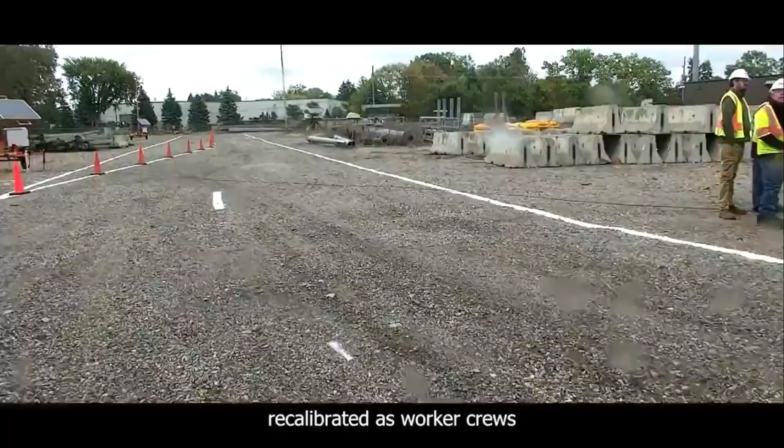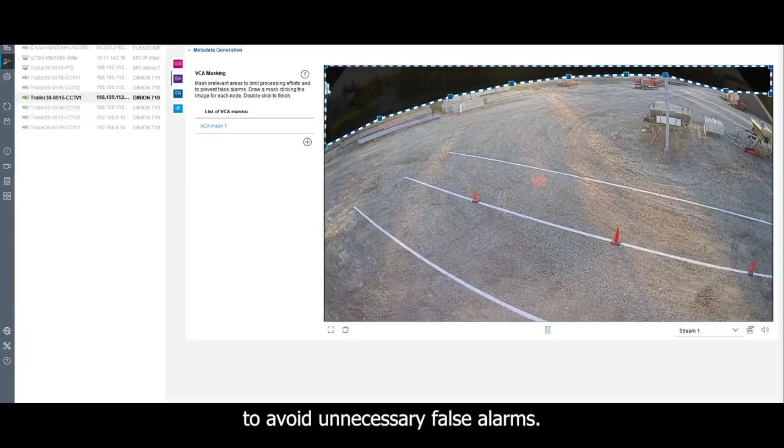Calibrating the system is as easy as drawing shapes on paper, with notifications activating based on object motion or presence in defined alert zones. Conflicting objects or areas that should not trigger alerts can also be easily masked out to avoid unnecessary false alarms. Having multiple cameras on each trailer means multiple viewpoints are possible, maximizing coverage.

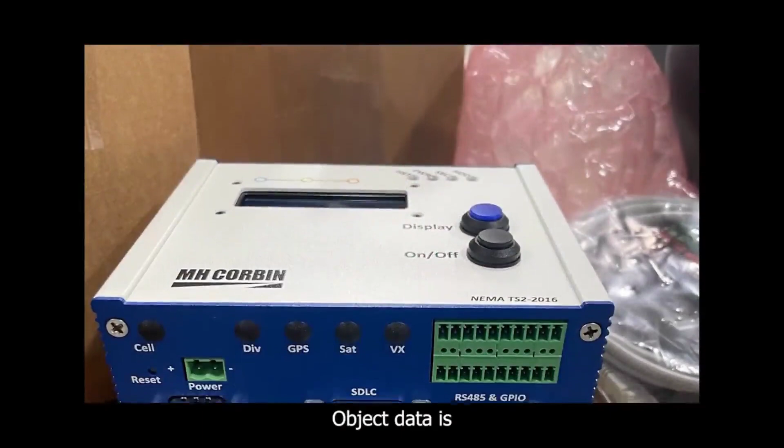Once the cameras are calibrated, they detect and track the movement of objects, including distinguishing personnel from vehicles. Each detected object has GPS, speed, and heading information calculated by the camera based on its position and movement relative to the camera. Object data is then fed to a small computer in the trailer's cabinet enclosure, which processes the detected object information and generates connected vehicle messages.

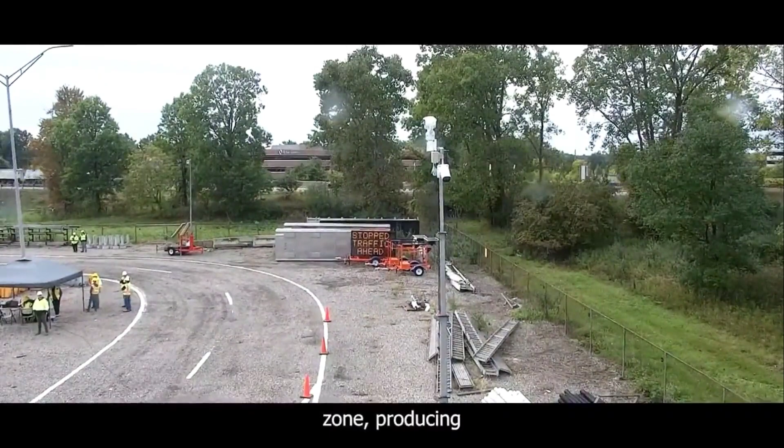These messages get broadcast by a roadside unit radio installed on the trailer mast. They can be received by devices called onboard units installed in participating fleet and freight partner vehicles, or any other equipped vehicles traversing the work zone, producing in-cab alerts and notifications about work zone conditions and objects. Personal safety messages are produced for all detected personnel, and basic safety messages are produced for all detected vehicles.

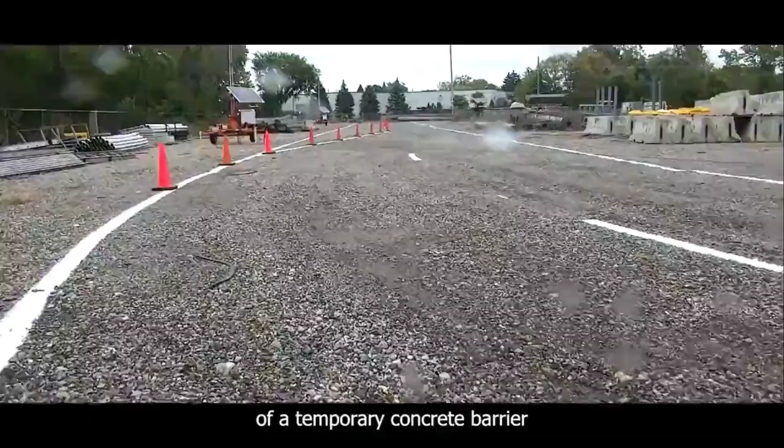Personnel that leave a protected area, such as by walking outside a temporary concrete barrier or operating in a lane closure only protected by barrels, will trigger special traveler information messages that warn operators of unprotected workers—look out for workers. These messages enable equipped commercial motor vehicles to see and display the presence of those objects, greatly increasing operator awareness of their surroundings.

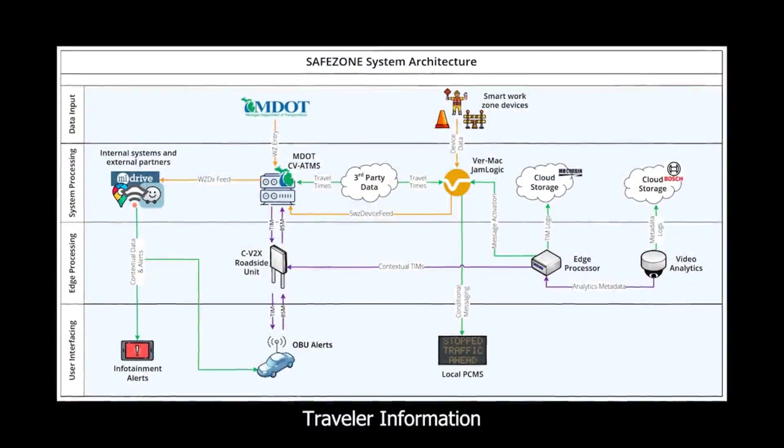Other components of the system produce messages as well. Smart work zone devices integrated with cloud software will detect the formation of queues and the activation of lane closure arrow boards. This information generates traveler information messages produced by MDOT's back-office connected vehicle ATMS and broadcast through the trailer radios, warning operators of upcoming queues or the need to merge lanes. Passively, the vehicles themselves will be able to identify the upcoming work zone and notify operators that they will soon need to decrease their speed.

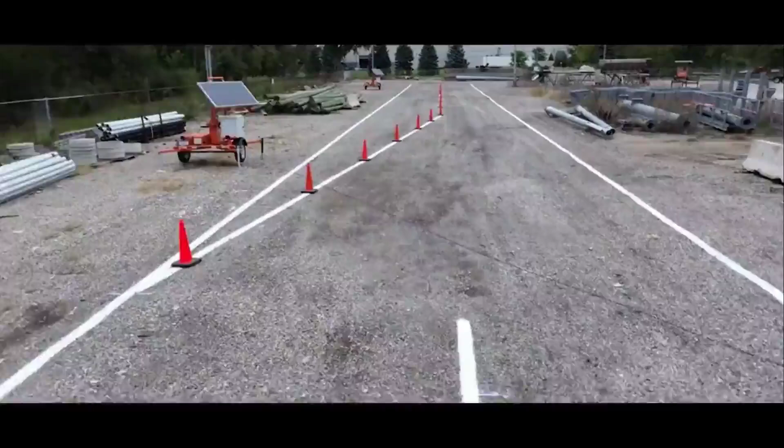Connected vehicle technology has been proven already through countless demonstrations and proofs of concept. MDOT's project pairs this established technology with new and upcoming tech, like advanced video analytics, to show the incredible flexibility and versatility of this technology.

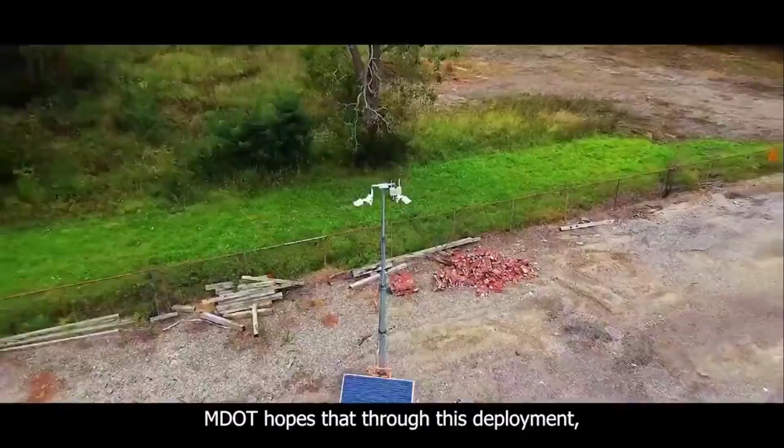Achieving Vision Zero will require creative and innovative solutions to protect our most vulnerable road users and solve our most challenging use cases. MDOT hopes that through this deployment, the commercial motor vehicle industry will recognize the immense benefits, encourage adoption, and hasten its deployment, both in vehicles and as a standard component of work zone traffic control.

All right, thank you. So going through some of the questions that we talked to you guys about, we asked if everyone was aware of the Work Zone Data Exchange, or WZDX. There was a number of people that actually weren't aware of that. So this slide is going to get into how some of that architecture works.

The best way that I can describe the Work Zone Data Exchange, or WZDX, in a short version, the way I explain it to someone not in the industry, is that it basically creates a language that can communicate different aspects of work zones in a uniform manner. That way it doesn't depend on who's creating that data, as long as it's in the correct format.

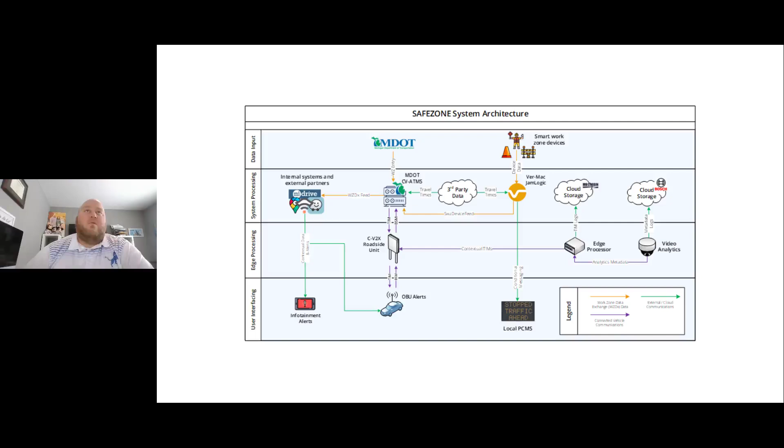So that's kind of the flow of the information, and basically how this is going off, it's going through mostly LTE, 5G, different services that are going out there. So just to show how this is processing and what's happening behind the scenes, it's really taking this information in, going to a data aggregator, then being published there for anyone to really take and get that data.

And it's in that uniform standard, so whether it's Google or Waze or any other TomTom type devices that are grabbing that information, it's in a standard format, so that way it can all be interpreted the same. So there's a multitude of vendors and everyone that can do this, and that is up to speed on that. So that is something you'll probably hear more and more about, but there was enough people that said they weren't aware of that, so wanted to take some time and explain that.

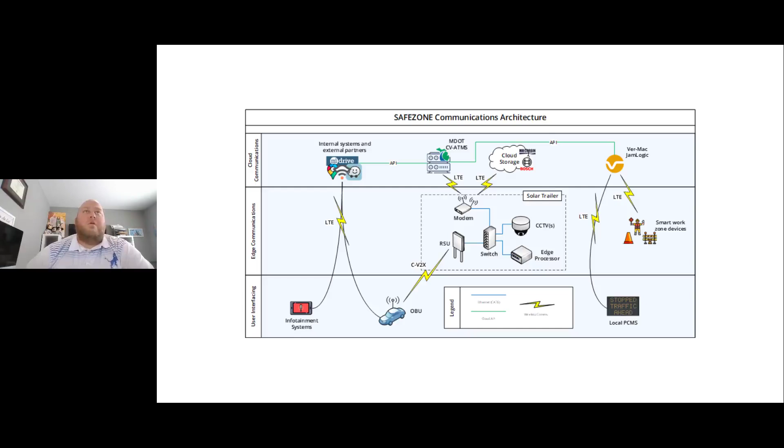So what have we done in Michigan? We have done a couple different pilot projects. I'm going to focus with you on some that are looking at identifying worker locations and identifying where workers are located on the roadway via some different types of technology. I'm going to get into that a little bit and kind of what we've done, what we've seen, some lessons learned.

So basically, this is what we were seeing. This is one of our first early tests that we did. This was on I-96 in the Novi area, out in the Brighton Novi area.

Basically what we did is we worked with GM and a couple of different manufacturers, and we actually had a worker out there. I myself was wearing the vest in the rain, and we had a GM vehicle that was modified a little bit to have their dashboard upgraded with an HMI display. Then as that driver was driving through multiple times, giving different people rides, it would come up on their dashboard and say 'worker located ahead.'

So the story about that is I was sitting out there, and after about 4 or 5 times going through - this was around 2021, so we were still abiding by COVID, everyone had to wear masks, and you could only have so many people in the vehicle, so there were multiple trips. Standing out there in the rain on the side of the road, I got a little bored, so I switched spots.

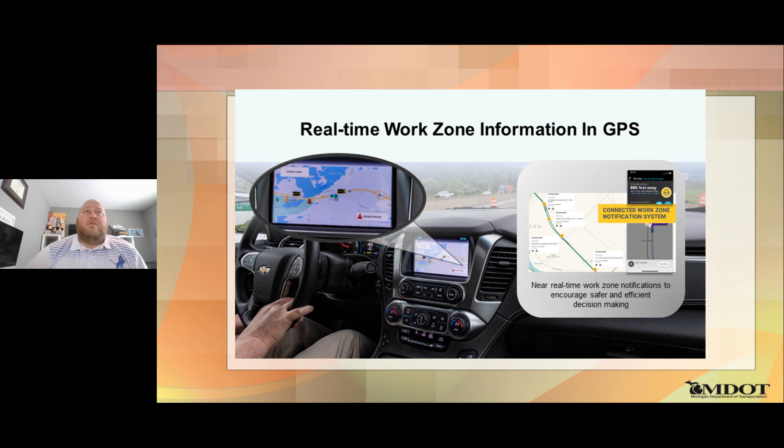But what we did in the fall of 2023 is what I really want to focus on, getting into something MDOT does specifically in Michigan. I know not all states have these types of speed limits, but in Michigan our normal speed limit on a roadway is most of the time 70, with a couple at 75 miles per hour.

The way we post our work zone speed limits traditionally is with a reduction to 60 and then 45 where workers are present. There's always a big discussion on what 'workers present' actually means, and when do you slow down versus not. So in lieu of trying to increase compliance and actually slow people down going through the work zone, we took this pilot as a chance to do that. Our goal was to reduce speeds overall and get a more uniform speed through the work zone, only telling people to go slow when they actually needed to.

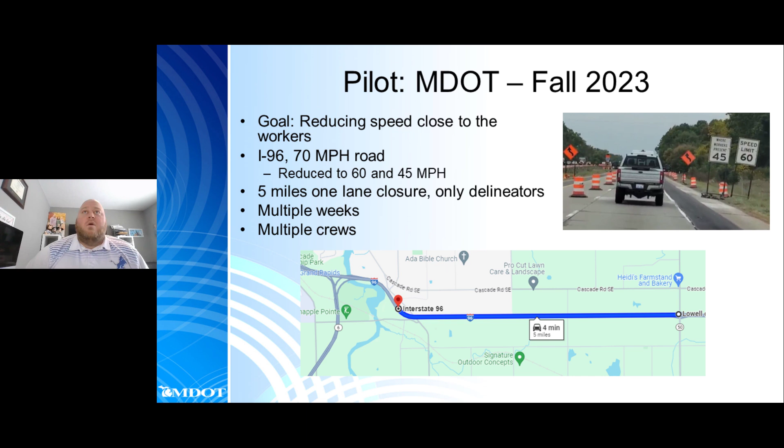It was about a 5-mile closure over multiple weeks, doing concrete patchwork, so a very high exposure level for workers. It was just drums closing it off. This is a picture from that actual work zone. What we did is set up digital speed limit displays on the project.

What we expected, and how it was programmed, is if a worker was between two digital speed limit signs, the sign upstream would turn to 45 with flashing lights. Once they exited that section, the second sign would say 45 workers present, and the other two signs would say 60. In a third scenario, the first two would be 60, with the third sign being 45 workers present. And in a fourth scenario, the first and third would say 45 workers present, while the middle one would be 60 because there'd be a stretch with no workers present.

So we wanted people to not slow down unnecessarily, and then travel - we wanted those signs to be accurate, up to date, and really changing in real time.

One thing we realized from doing pilot tests with digital speed limits before this is: who's going to change those signs? We had a project where we tried to do this manually, without sensors or technology, and we found there was a very low level of compliance. It wasn't on the top of the priority list of things to get done, so it often got missed.

One of the other things we had to discuss is what the latency should be, and how long we want a worker to remain in each segment before it turns off once they leave that area - how fast it switches back. We didn't want the speed limits flickering back and forth, so we looked at some of those things - I'll talk about those points in our lessons learned. We also wanted to make sure we documented what the speed limit said, when it said it, and how we were tracking that.

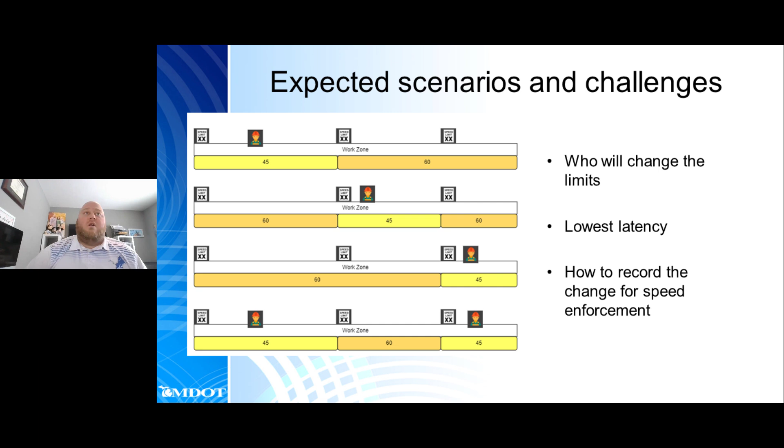So that's one thing we're working on too: do we need some sort of forward-thinking range, so that if you're within a certain distance in front of that sign, it changes? But also, if every worker had a sensor on them, that probably would have changed the sign as well.

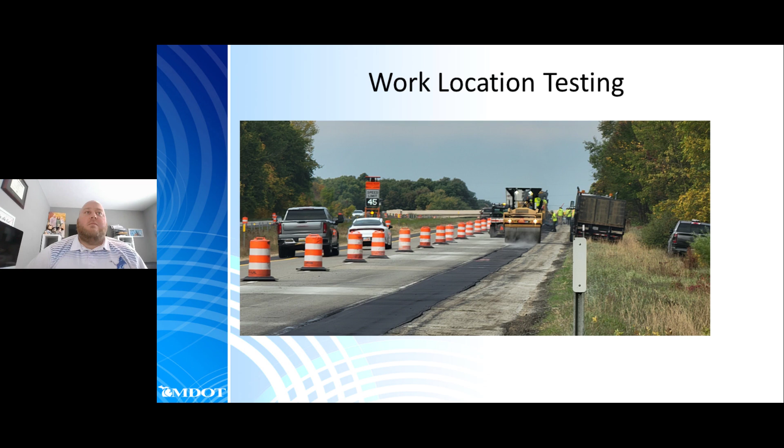There were other times when we were out there and this was coming up, but you couldn't actually see the workers because they were just downstream. So we did have the speed wizard out there, which also gives speed feedback to vehicles driving through, leading into the work zone. Really we're trying to get that compliance. So in doing that, that's how we had it set up, what we were doing, what we were thinking.

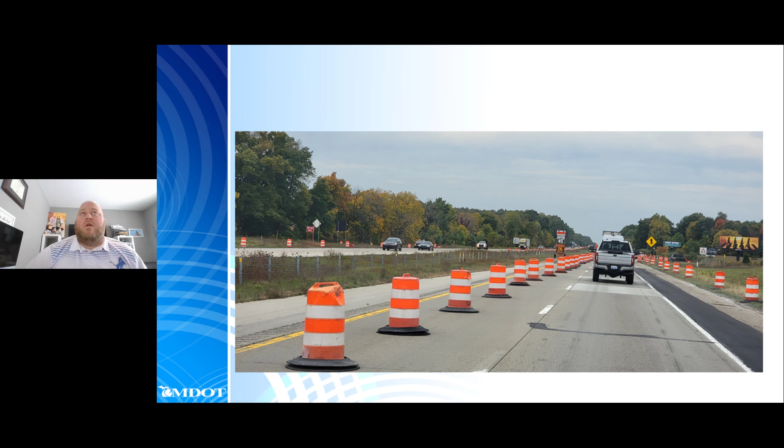And really, it was an awesome experience, an awesome pilot project. We got a whole bunch of information, we learned a lot, and definitely have some things we need to work on and refine. That's kind of where I'm going to focus my time, but I just wanted to set the stage and let you guys know what we did and what we were trying to accomplish.

So now getting into the lessons learned: one thing we did was make sure we had that historic log, and the system we were utilizing did log those automated speed limit changes. So that's something that was documented.

One thing we ran into was the GPS location and refresh rate. If you've ever used your phone for walking directions and pulled up your GPS - if you have an iPhone, I'll explain that since that's what I have - the blue dot, the circle gets big, then smaller and smaller, narrowing in and really locating you. When you're doing that, it's pinging your GPS location and mapping you.

What we realized in some of our testing is I walked about 2 steps past a sign and waited, and it didn't change. I walked 2 more steps and it still didn't change. Then sometimes it would be 5 minutes, and all of a sudden it would just change. So what we looked at is how the GPS was set up in the devices - it wasn't actually taking the point location, it was taking an average location of where you had been and factoring that in.

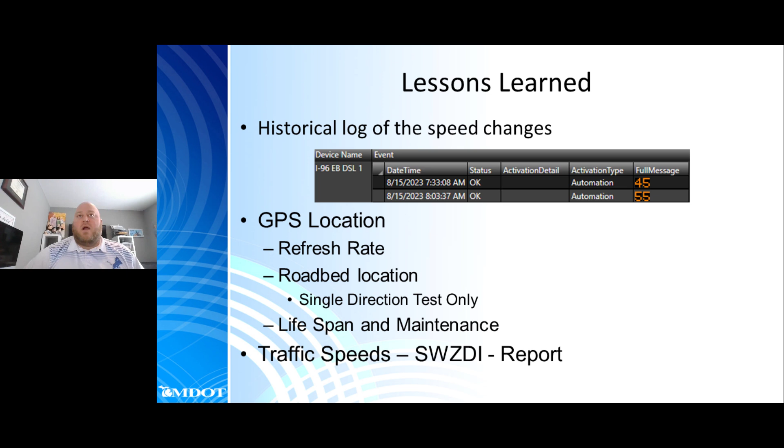We got some really good results with vehicles slowing down and people actually respecting that speed limit. We still have a lot more to do. We still have to figure out when this alert goes into the vehicle, when do we alert them, how long does the alert last, what does it look like, what's the intensity - is it a haptic seat vibration or something else? A lot of the auto manufacturers are now working on that.

We've also looked at solving this for in-transit workers - if you're going to or from a job site, there's now a speed element attached to the sensor, so if you're going over a certain speed that would get pulled out of that system. Here's an example of how the system works in a Chrysler Jeep Stellantis, going through.

This was a real project that went on. They had a sensor out there. Drivers went by, this came through their dash, and then it notified the driver: caution, maintenance vehicle nearby. That was just through their Uconnect system.